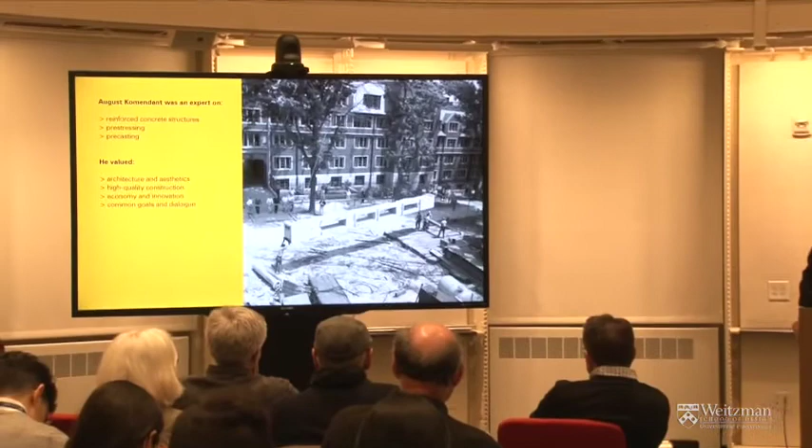Professionally, Komendant was an expert on reinforced concrete structures. He, from his studies onwards till the end of his career, focused only on concrete structures. He didn't work in steel or in timber structures. He was educated at the time by the best German professors. Germany was more theory-oriented in terms of concrete structures at the time. So Franz Dischinger, for example, might be the best known name.

He defended his thesis at the time. Komendant was a student at the school in Dresden. Early on, Komendant became interested in pre-stressing technology, which was developed by Eugène Freyssinet and Franz Dischinger in France and Germany, respectively. And after the war, Komendant was doing extensive work on precasting technology.

Why Komendant is important to me as an architectural historian is that he is among those structural engineers who valued high-quality architecture. He was very motivated to work with highly talented, often poetic architects, like Louis Kahn, for example, with whom he worked on about 15 projects. 7 of them got built.

It's a coincidence that they were both originally from Estonia. Louis Kahn left Estonia when he was 4 or 5 years old. Komendant spent a longer time there, and in late 1950s they met here accidentally. But I will come back to that a little later.

So Komendant was not just a service provider to architects. He was highly interested in the quality, not only of design, but also the actual construction process and the final quality of what gets built.

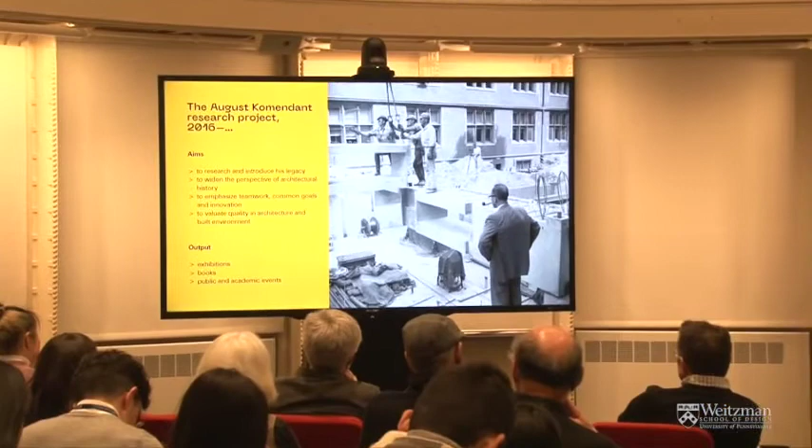Structural engineers have had a major role in a lot of interesting buildings which were built in the 20th century, but which are getting built now as well. We also wanted to emphasize the teamwork aspect.

We reached out to contemporary engineers and involved them in the exhibition project, gave them guided tours of the exhibition, and many of them came to visit the museum for the first time. So it was a nice way to reach different audiences with this, and sure, to evaluate the quality of architecture and built environment of the very recent history.

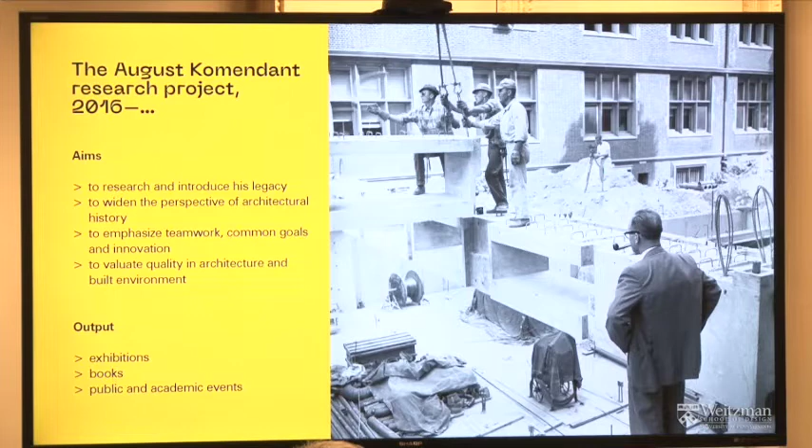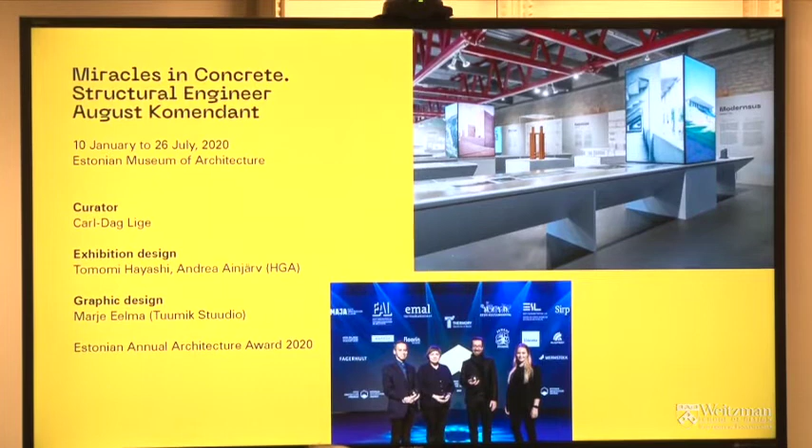So the outputs of the project, I would say the first large one was the exhibition. This was presented at the main exhibition hall in Tallinn, the Estonian Museum of Architecture. We were glad to receive an annual architecture award from the Cultural Endowment of Estonia for their core team of the design of the exhibition project, graphic designers and the architects of the exhibition.

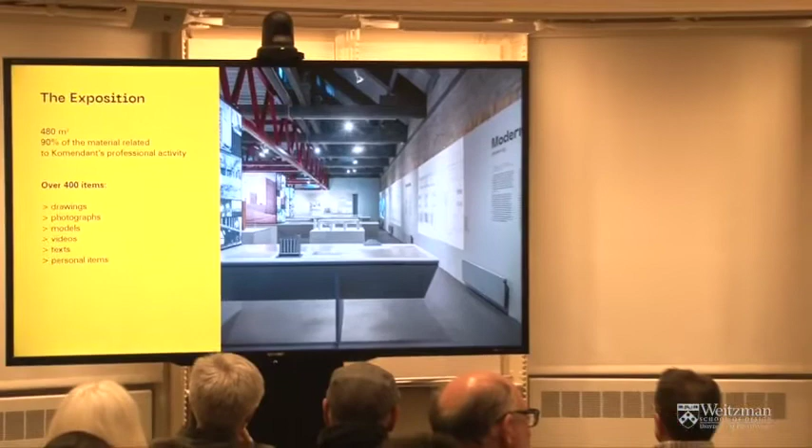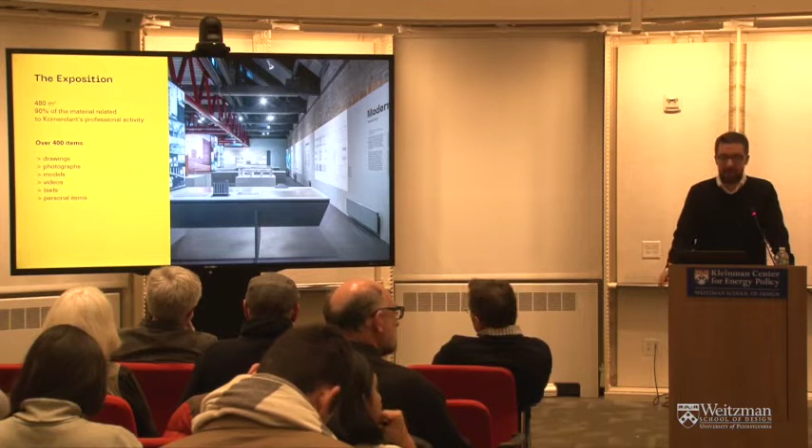It was close to 500 square meters and more than 400 items related to Komendant's career, many of them from the collection here at Penn.

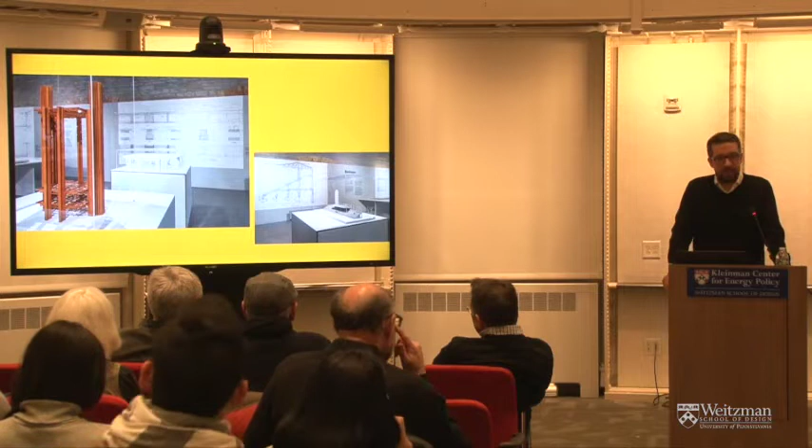On the left-hand side, you see an early structural model for the Richards Medical Laboratory building. This was the first time ever this model traveled not only outside of the US, but outside of Philadelphia. Let's see if it ever travels again.

So there were different personal items in addition to design drawings, models, and photographs on display.

This summer, we finally finished the book. The same core team, Marje Eelma is the graphic designer, together with her partner Martin Eelmaa of Tuumik Studio. The majority of the images are previously unpublished, and since I'm a historian, I don't have a technical background, either in engineering or architecture. So I did not want to cross my expertise, so to say. I tried to involve those who are more competent in the technical side.

I had a consulting engineer, a legendary Estonian engineer, Tiit Masso. He read the manuscript, made hundreds of remarks, and now, honestly, I can say that I am happy to give this book also to structural engineers to read as a history book, not embarrassed of its content.

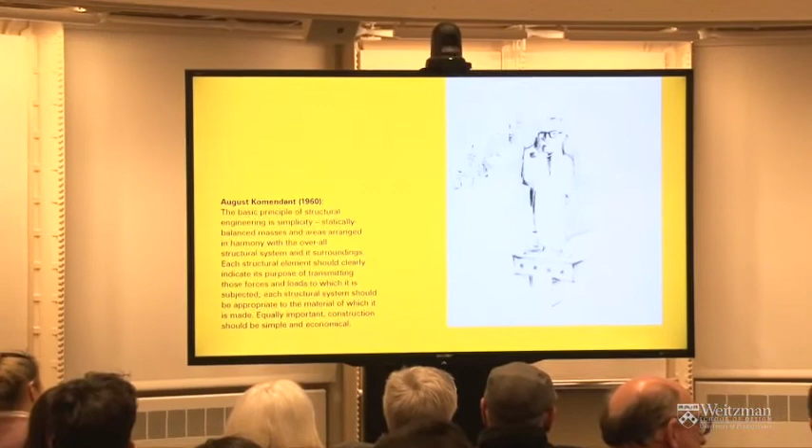It's like the core of his values, and I will cast a light on different components which are included in this. On the right-hand side, it's a nice caricature made by his daughter Merike. It's a concrete element, a column, part of the column of the Richards Medical Labs, and in the background probably the skyline of New York.

In his 1972 book, Contemporary Concrete Structures, the first proper chapter of the book is called Critical Evaluation of Design. There he addresses several concepts of design which combine architecture and engineering. So he kind of tries to build the bridge.

In terms of the creative activity, he emphasizes four different phases. First is the image phase, which includes the processing of ideas and concepts, meanings, the weighing of possibilities, and the analysis of meanings. This phase is abstract, free of limitations. This is immeasurable. This is something which is, let's say, more common to architects.

The next phase, the design phase, is more practical. It's the realization of the initial image. It's not abstract because it involves practical considerations and limitations. The third phase is construction, the building of reality and the realization of design.

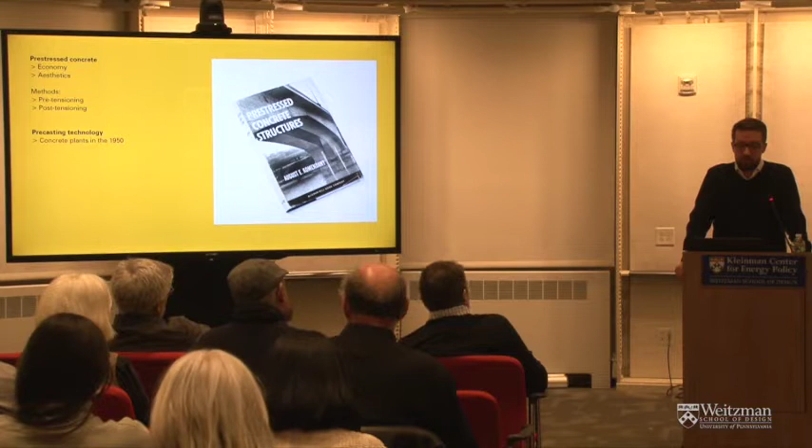Precasting - when he moved to the US, he designed several concrete plants, not only here but also in Latin American countries. So about 5 or 6 projects.

A few examples of his innovative use of concrete would be those. This is one of his first professional projects. It's located in Tartu, Estonia. On the right-hand side, a new hangar for aircrafts - it's a repair workshop. So there he used...

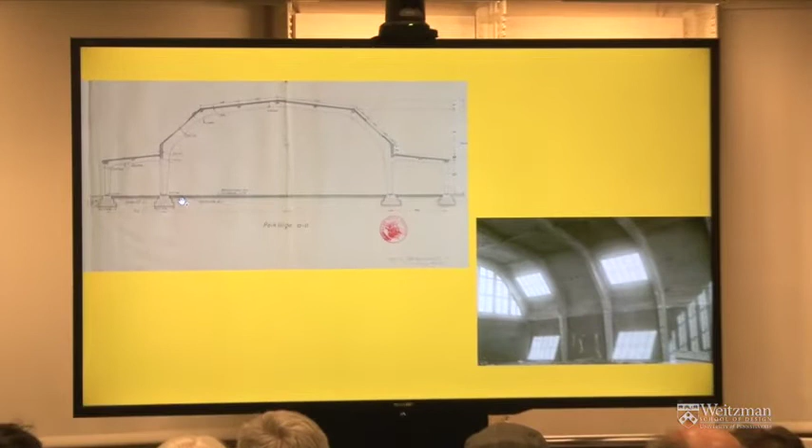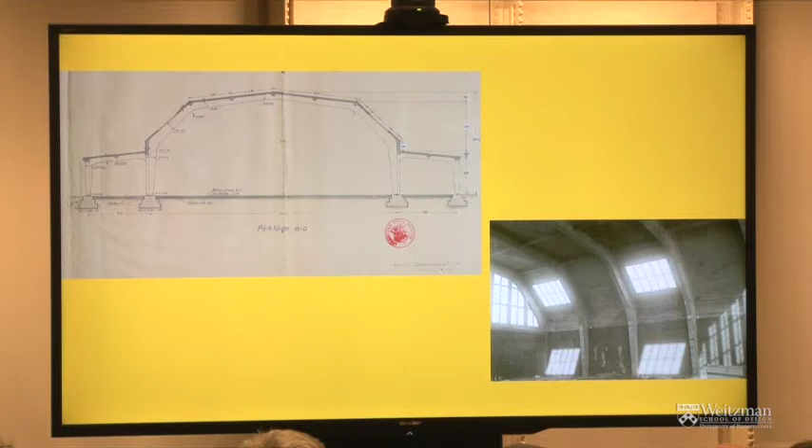This is supposedly the first case in Estonian architecture where pre-stressing was used. There are tie rods cast into the floor level here, and the steel bars which go inside the tie rods were pre-tensioned with huge wrenches before casting.

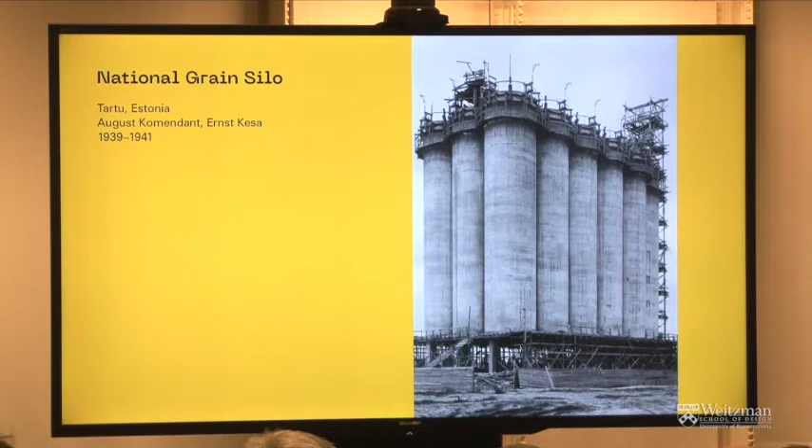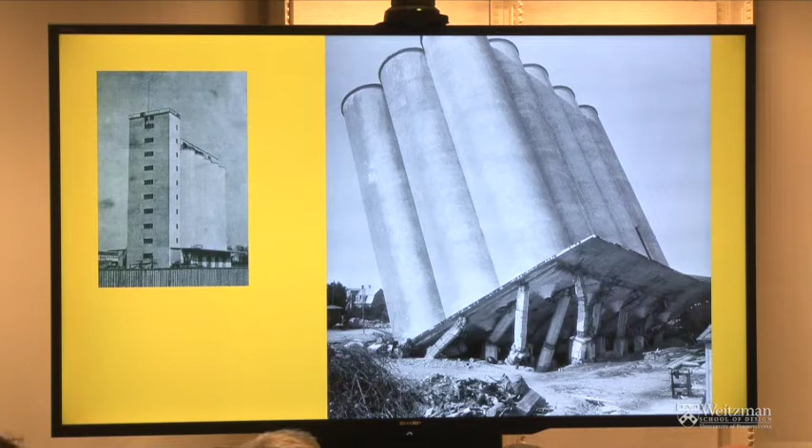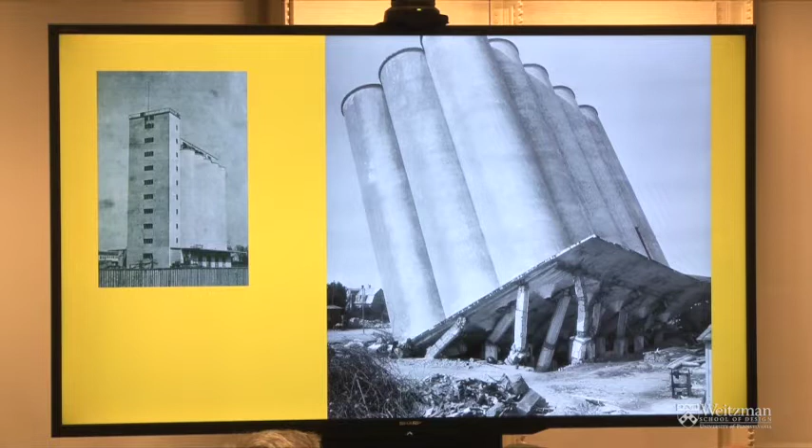This is another early example, a grain elevator, a grain silo, also in Tartu. Here Komendant proposed the use of so-called sliding formwork, which mechanically helped to lift the formwork so that you didn't have to build the whole structure or the whole form. Some workmen on the construction site. On the left-hand side, the silo as it was just completed in 1941. During the Second World War it was blown up, but part of the silos remained intact and was actually put back in use after the war. It consists of 15 monolithic concrete silos.

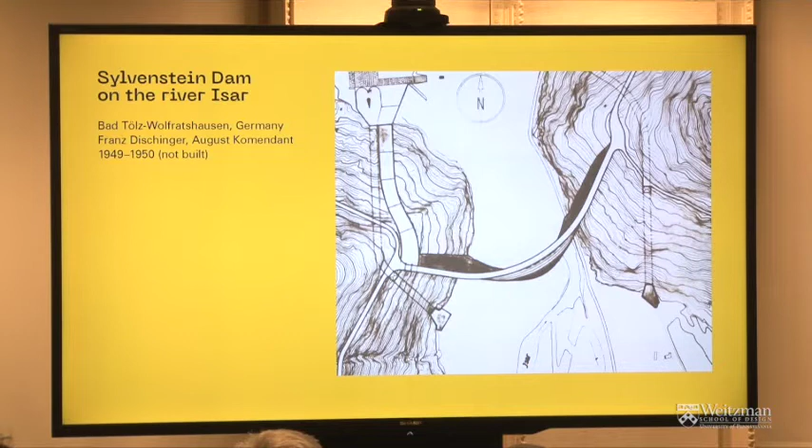Here is an experimental design project done together with Franz Dischinger after the war. It was supposed to be a huge dam on the river called Isar in Germany.

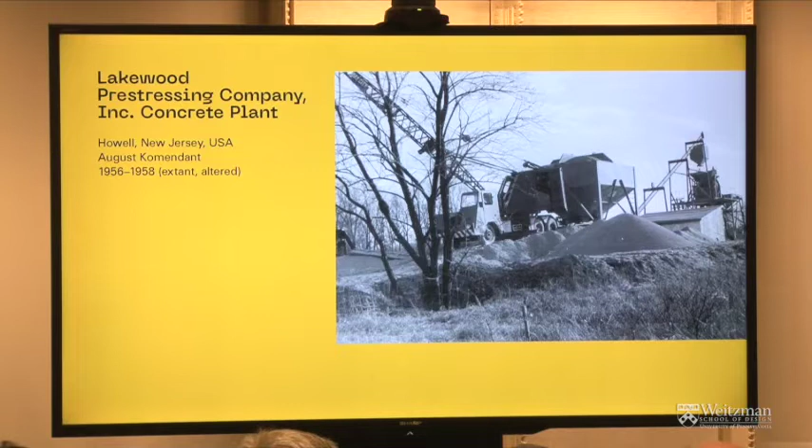There's another unbuilt project done together with Henry Klumb of Puerto Rico. He was of German origin, but later moved to Puerto Rico. This is a design for a church which combined precast elements and shotcrete concrete, which is a spray concrete.

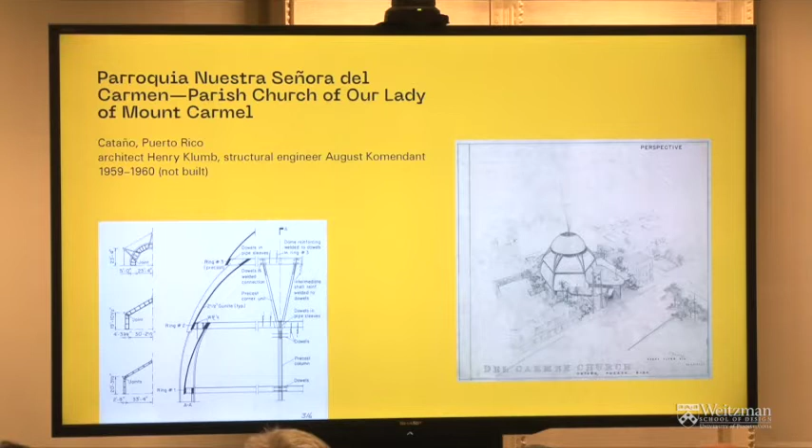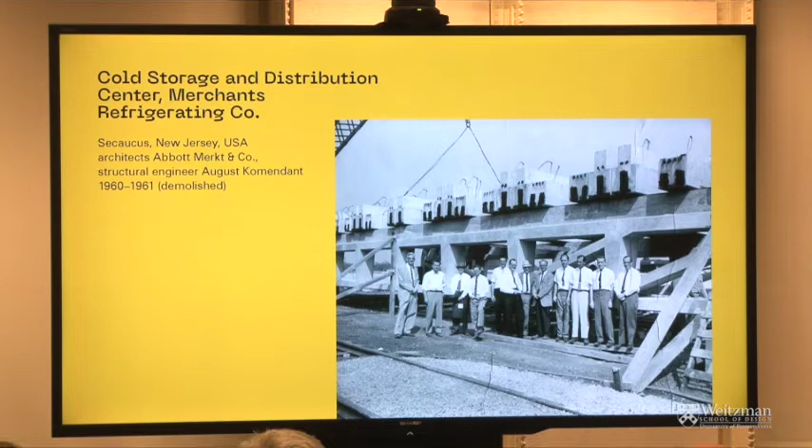Here is a group of engineers and contractors in another concrete plant. And this is one of the huge Vierendeels, so-called Vierendeel trusses, that was cast to build storage in New Jersey, a cold storage. Here you can see the assembly of the building.

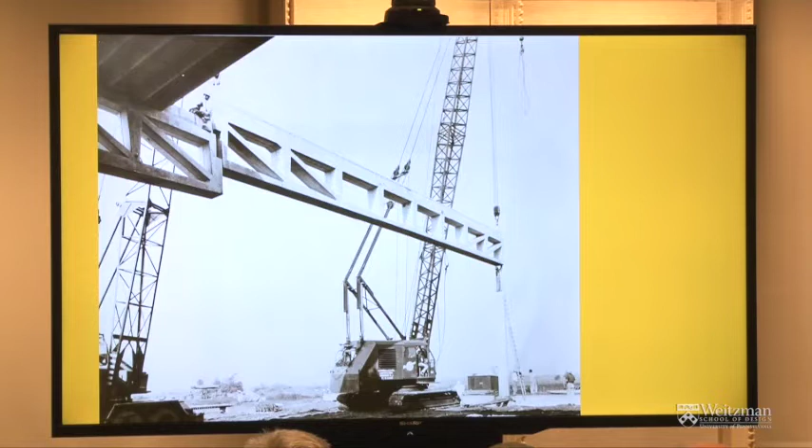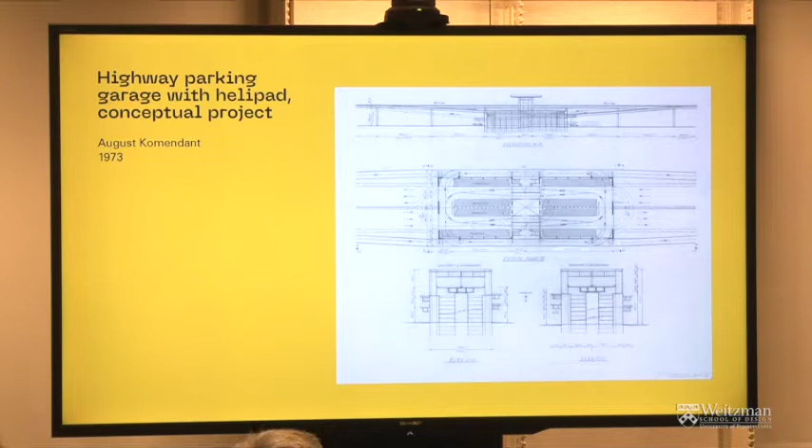So here's an experimental project by Komendant himself. It was like a highway, a garage and a helipad, and in one version included also a restaurant. How to combine highway design and architecture. I think he did it as part of one of the classes here at Penn. It was like an example to the students.

And another example is the K-System. It probably refers to the Komendant system. It's a modular building system he developed based on his experience on Habitat 67 and some other projects which used precast modules to build self-supporting boxes.

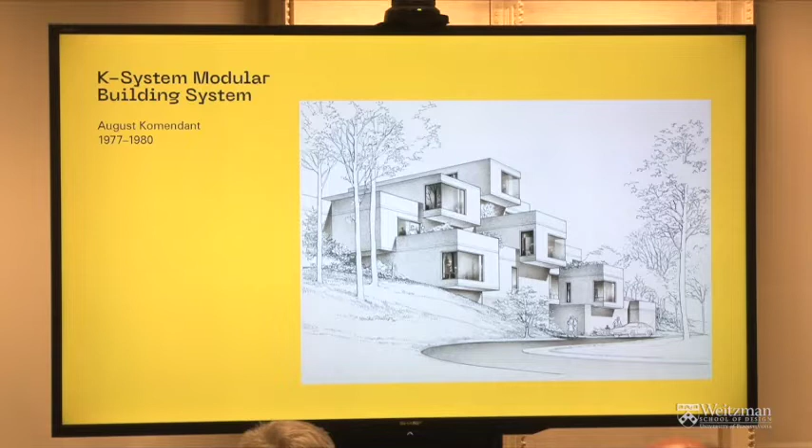But now, I chose 7 iconic projects by Komendant done together with more or less well-known architects, and I will briefly explain their background and try to bring out Komendant's role or the importance Komendant brought to the project.

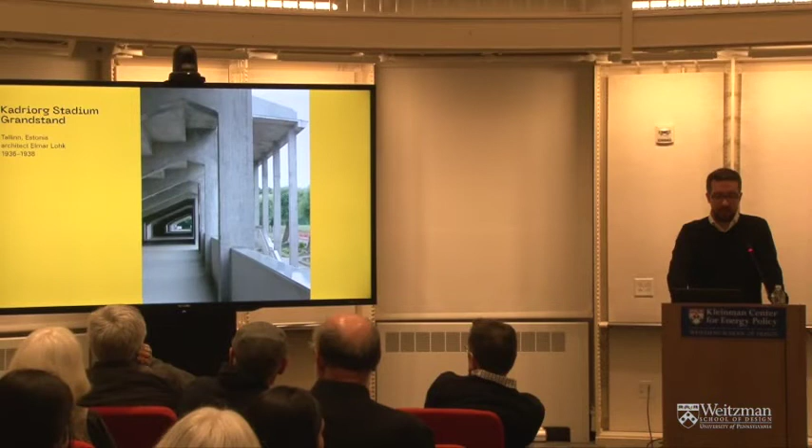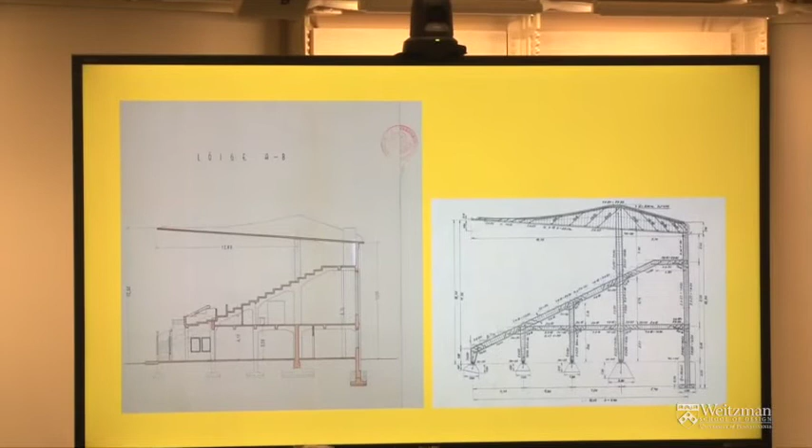So here's, I would say, the most important early work from Komendant. It's a stadium grandstand in Tallinn, Kadriorg Stadium, designed by Elmar Lohk, who was one of the best modernist architects in Estonia at the time. Here the most remarkable thing is naturally the cantilevering roof of the grandstand. Sure, there were earlier examples by Nervi, by Finnish architects who designed the Helsinki Olympic Stadium, but in a small country like Estonia, which didn't have a large construction industry and competence in that field, it was quite remarkable. This is a post-construction photograph just after it was finished, and it remains the most important national track and field stadium in Estonia.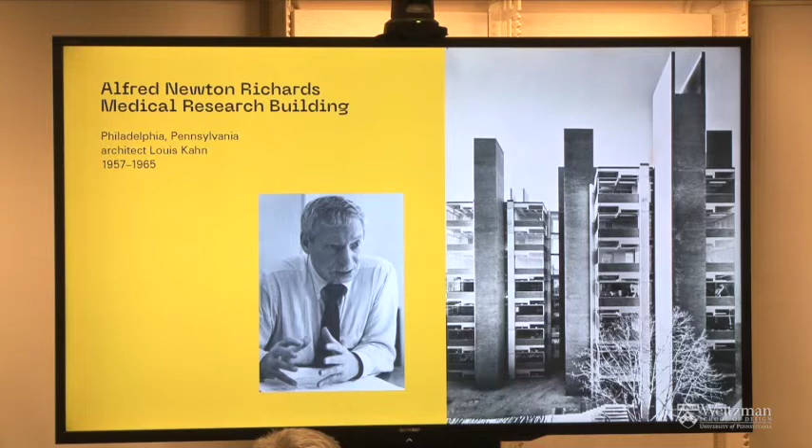Second project, we come to Philadelphia. The first major project Komendant did together with Louis Kahn is the Richards Medical Research Building, close by, just a block away. Komendant was reached out by Kahn's engineers to initially design a competition proposal for Enrico Fermi's memorial in Chicago. But it was also at the time Richards was just starting, and Kahn had become interested in precasting and new possibilities of concrete. So Komendant was somebody who could consult him to realize Kahn's visions.

This is an early structural solution. The model I mentioned briefly before - on the left-hand side, it's not visible very well, but it's an elevation of one of the laboratory towers.

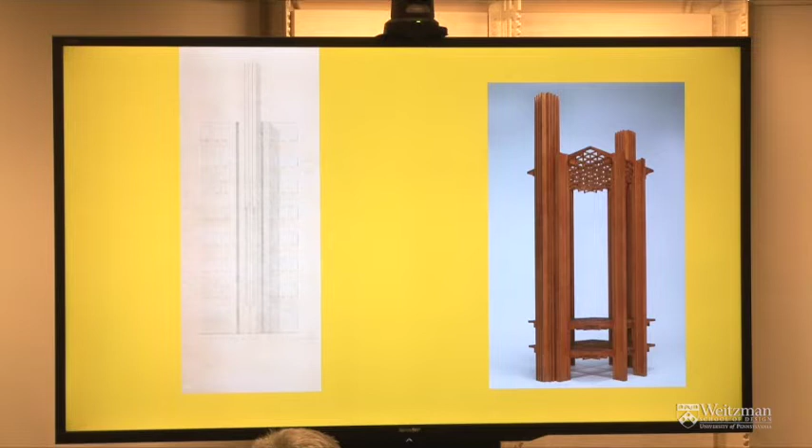And Komendant designed the structure to be built of precast elements. Here is the scheme, and it's like building a three-dimensional jigsaw puzzle out of concrete elements.

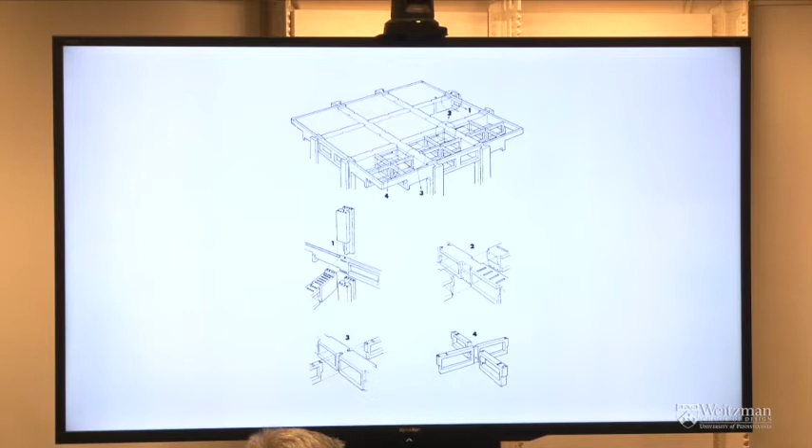Precasting technology and building out of concrete elements was a very new thing in the US context at the time. There were some earlier studies and implementation cases in Western Europe, but Komendant was somebody who tried to popularize precasting here in the States.

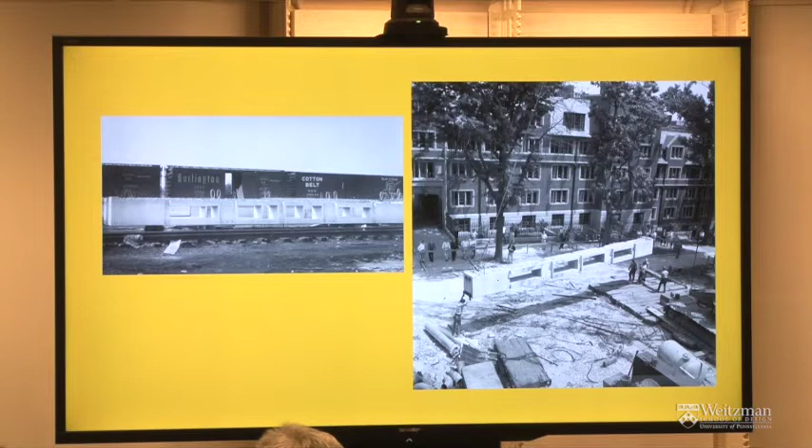This is Komendant's early design for one of the Vierendeel trusses. This is the early phase. This is how the final Vierendeels look like. On the right-hand side, they have arrived on the construction site. Here, the construction has developed further. On the left-hand side, this is the post-tensioning procedure with hydraulic jacks.

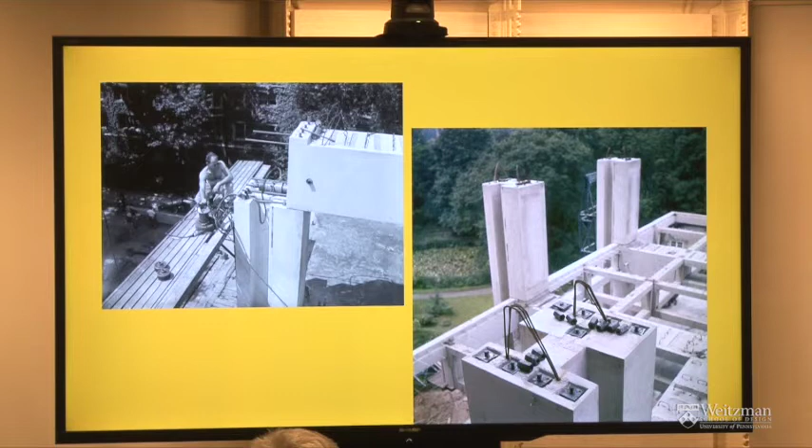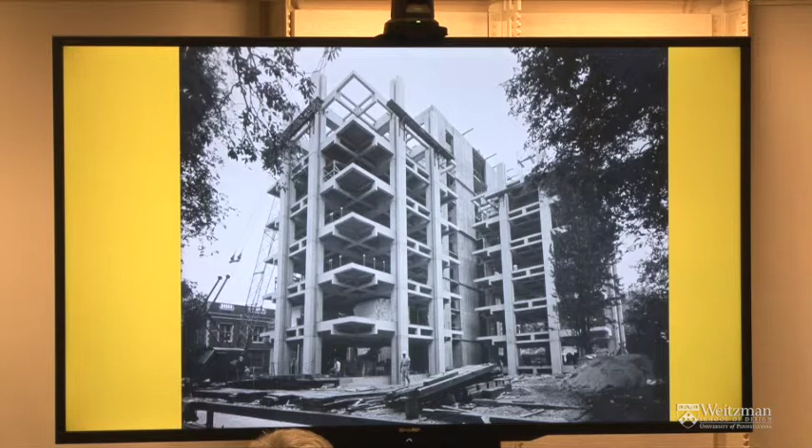This is how the floor slabs were prepared, different components put together. The central tower was built of monolithic concrete, but the laboratory towers were of precast elements.

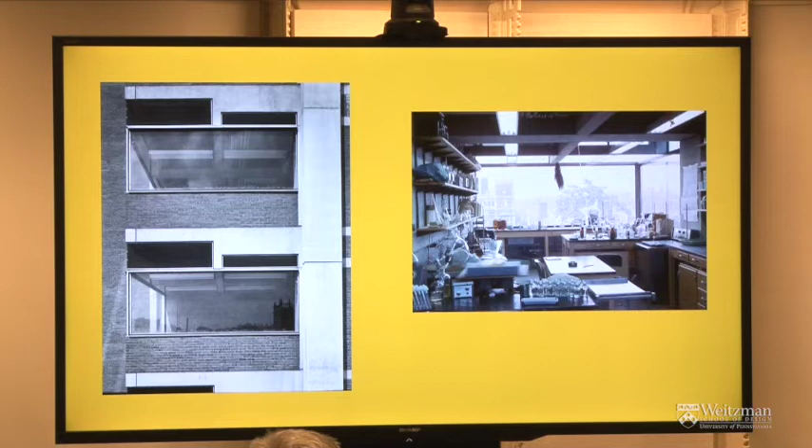And here, as many of you know, Kahn, together with Komendant, tried to express how the forces are distributed within each individual element, which parts are carrying, where you need stronger elements and where lighter elements.

I really like the photograph on the left-hand side. This is after the completion of the first construction phase, before the so-called biology towers were built. This is like a one-to-one scale section of a building in real life, which clearly exemplifies the principles of expressiveness mentioned before, how a building or a structure speaks about itself.

Another Philadelphia project, superbly important in the contemporary moment, with the uncertain future of it. The Philadelphia Police Administration building was one of the few projects Komendant did together with Geddes, Brecker, Qualls and Cunningham.

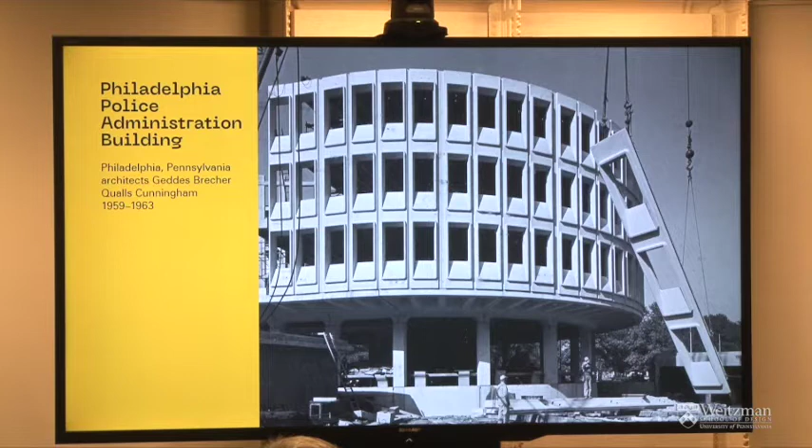This was among their first projects, and they were also interested in new technologies, new possibilities, and decided to involve Komendant in the process.

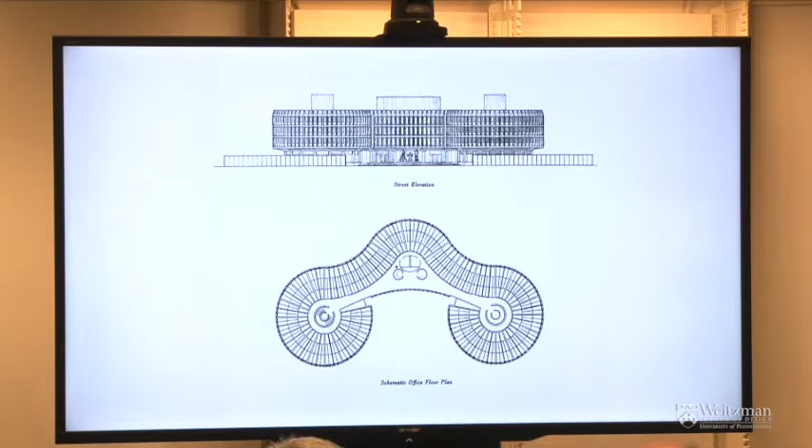So here's a street elevation and a schematic office floor plan with reflected ceiling plan. You can see the distribution of individual precast items or elements.

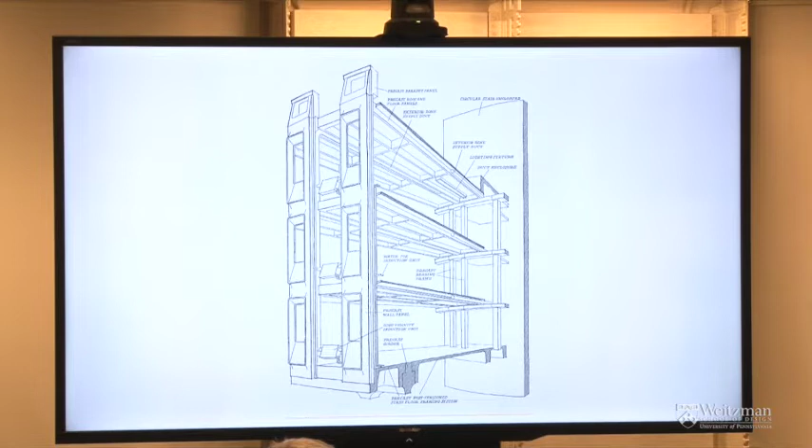This is the structural system. I'm not going into detail here. These are floor elements, and again the post-tensioning procedure. This is the facade panels.

These were load-bearing, post-tensioned structural elements. So this is not a curtain wall, but the exterior elements work as an organic part of the whole structure.

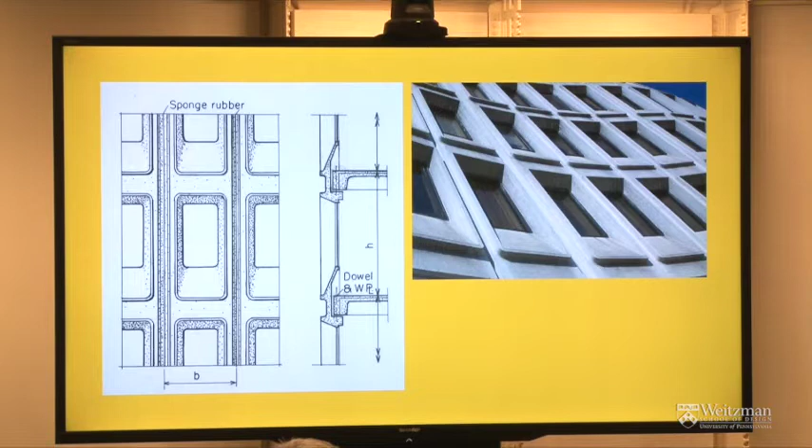At one point, there appeared cracks in one part of the structure during construction. Komendant, on the left-hand side, talking to Bob Geddes, was called on site, and as Geddes remembers, instantly knew what the problem was.

Apparently, the contractor decided not to put some steel rods in places where Komendant had required, just to save material. But if you skip some relevant materials in critical parts of the structure, then sure, you will have problems. But it didn't cause any substantial problems. Those parts which were problematic were redone, and the construction continued.

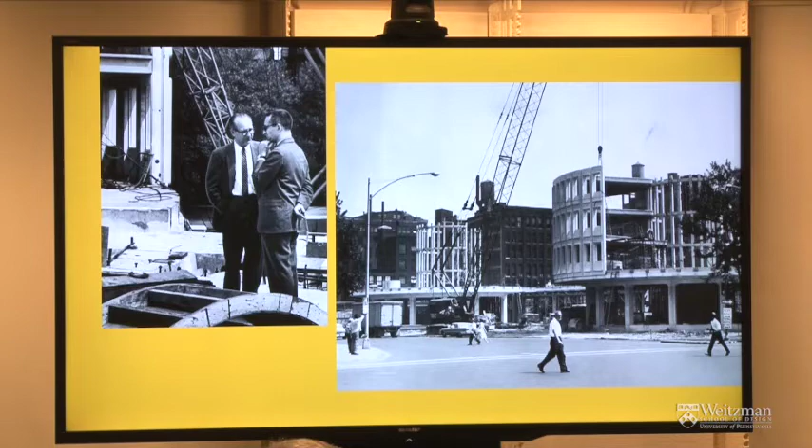So this is how the building looked after it was completed. Some color slides just a few years after it was completed. These are by George Yuri Komendant, who visited his father's work.

So, as many of you probably know, currently there's a huge debate going on about the future of this building. I can just express my personal opinion that it would be a terrible shame if this building was torn down. Sure, we have to acknowledge the injustice that has been done to particular social groups during the past decades related to police violence. But I would claim that architecture or an individual building is not guilty.

People make mistakes and bad decisions. There's a good possibility to rethink the future of the site, to involve those local groups that have been suffering the most. But sure, there's the debate.

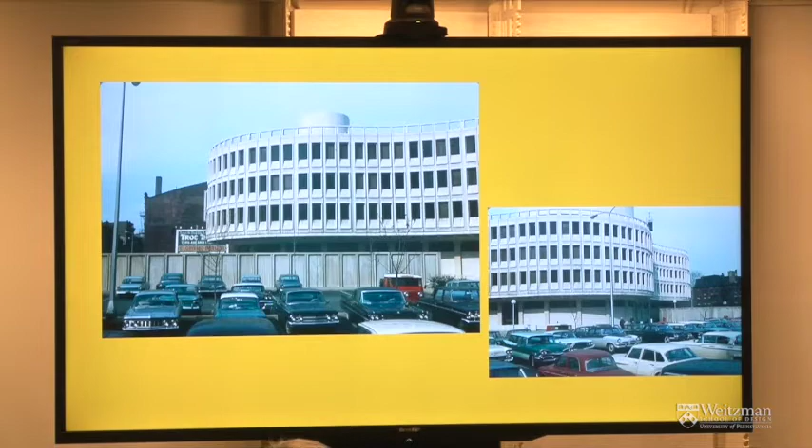I even wrote a short piece on the community wall, or whatever you call it. I'm not sure if it changes anything, or what are the key factors the municipality considers when they articulate their final guidelines for the future.

But as an example of innovative architecture and engineering, I think in the future it would be a remarkable site in Philadelphia to illustrate the optimism of the 1960s, how to contribute to society. It was kind of a renewal wave in the city. The Rizzo regime came later and kind of invaded the building and its architecture.

But we move on, time passes. We come back to Louis Kahn. Komendant was one of the primary structural consultants to Louis Kahn, also in case of the Salk laboratories, or the Salk Institute for Biological Studies, to be precise, in California. This is the iconic image, as you know.

On the left-hand side, an early sketch by Louis Kahn of the site. On the right-hand side, the building completed. This was the early site plan. The meeting house and the housing were not realized, but the laboratories were. This is the initial version where it was divided into 3 buildings. But Komendant was involved in both phases of the project.

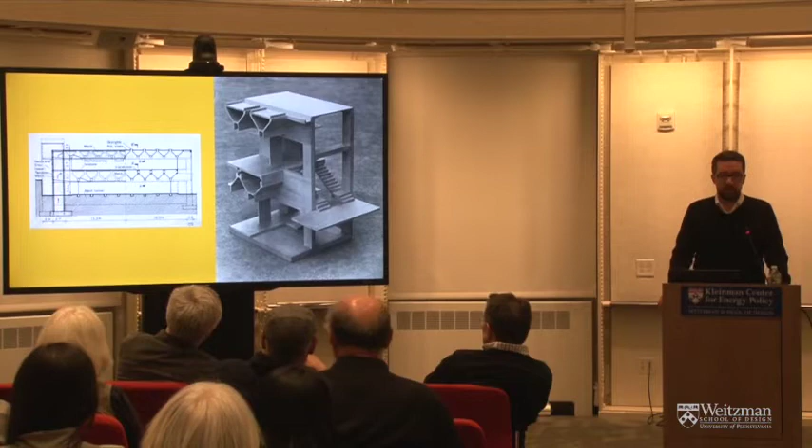So this is the early structural solution. It consisted of the so-called box girders and folded plates. The primary task here was to provide those large spans to make the work of the laboratories flexible.

This is not very well visible, but this is the final structural solution. Again, Komendant proposed Vierendeel trusses. So the central span is about 19 meters. And what is interesting here is that those Vierendeels, they form separate mechanical floors where all the mechanicals are placed so that the laboratories themselves remain free.

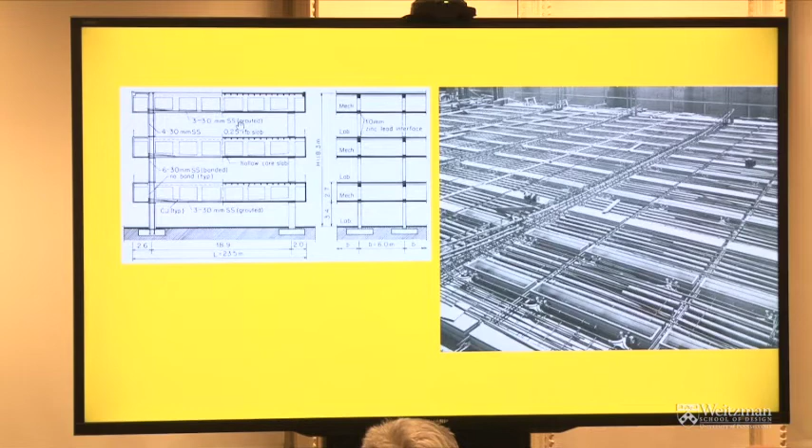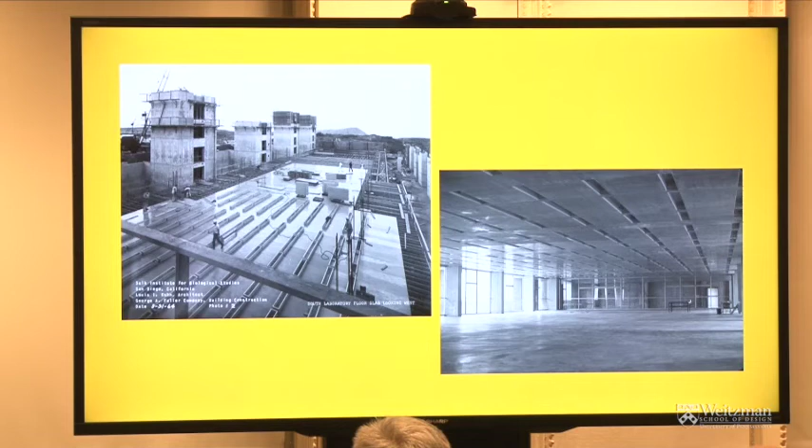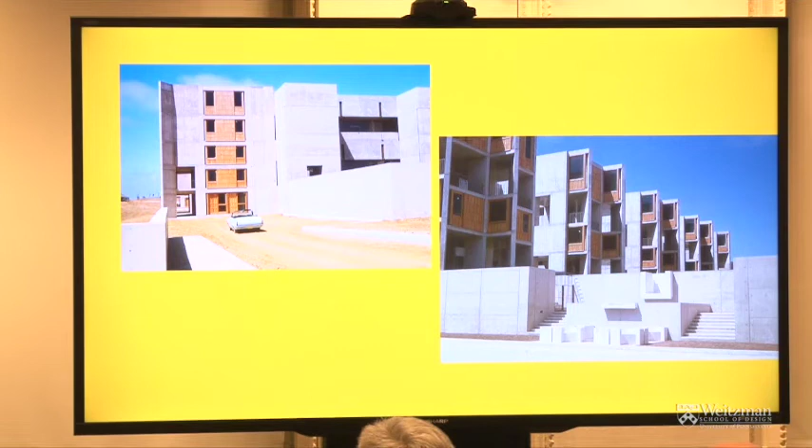Here you can see on the left-hand side preparations for casting concrete, and on the right-hand side the laboratory before it was put into use by scientists. The so-called study towers for researchers, and some color slides from the very final phases of construction. This is how it looked after it was completed.

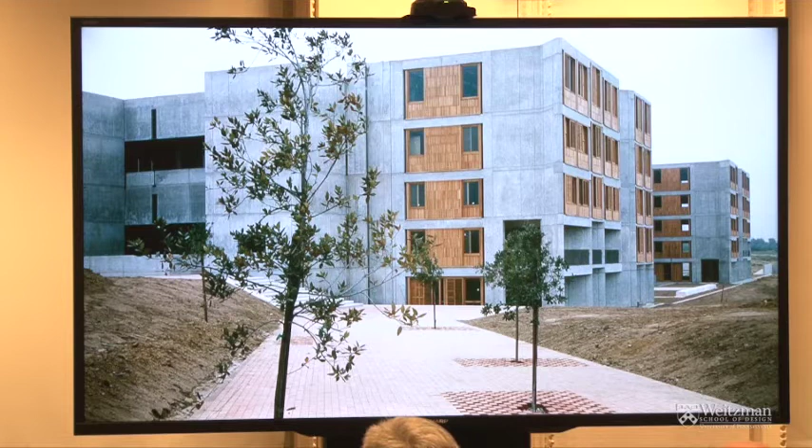Concrete having a substantial role, not only structurally but also architecturally. If you haven't visited Salk, I would strongly recommend it. I have to admit, this is among my top 3 architectural favorites I've ever been to. From the outside, many would say, oh, concrete, it's cold, bleak, ugly, whatever. But if you go there, the humane scale, the quality of detailing, the overall atmosphere of the ensemble, not to consider the climate and the top scientists, Nobelists working there—it's just great, it's just great.

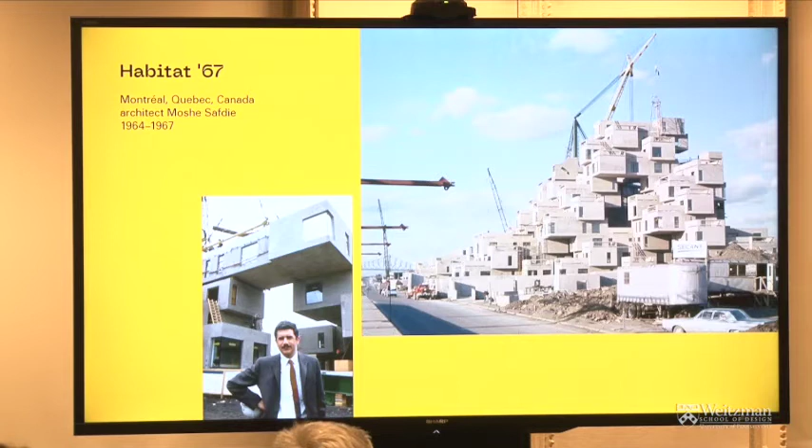Now again, briefly about Habitat. On the left-hand side, architect Moshe Safdie on the construction site. As a young architect, he was 26 or 27 when the project commenced. Sure, he didn't have the knowledge how to build that. He needed somebody like Komendant to make this reality.

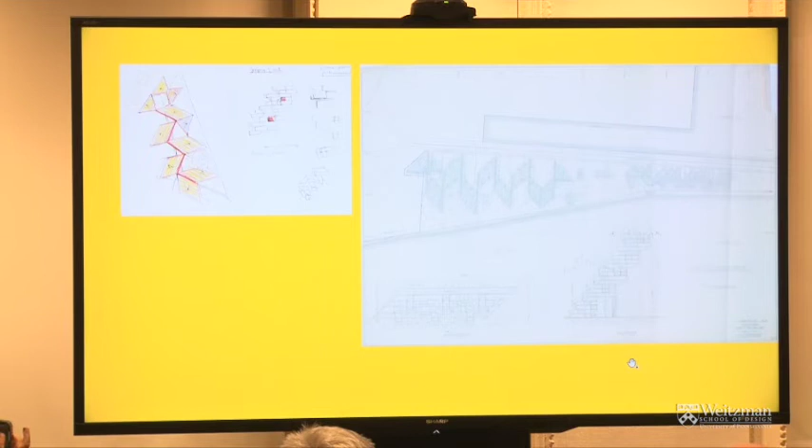What is interesting here, for example, is that Safdie dreams how the boxes would be put together. Komendant answers with cranes, trying to figure out how it would actually be possible to build on site, what's the location, and what's the sequence of construction. So some early studies. On the right-hand side is a beautiful drawing by David Rinehart, who used to work for Kahn, but Safdie stole him for the Habitat project.

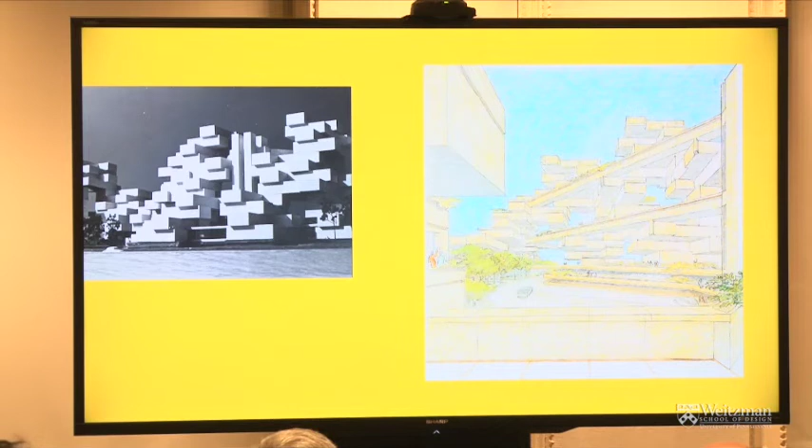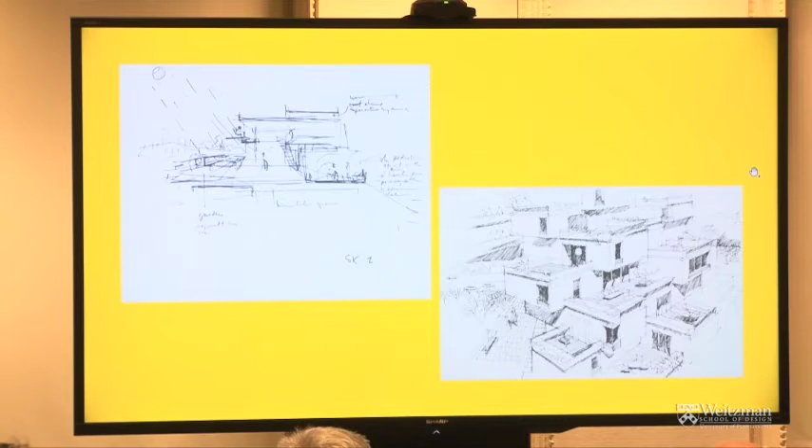The main idea of Safdie was to create a dense living environment, but one that would provide the qualities of suburban living or a private house. You had huge terraces, a lot of sunlight in individual apartments. So every apartment has a garden, some have several.

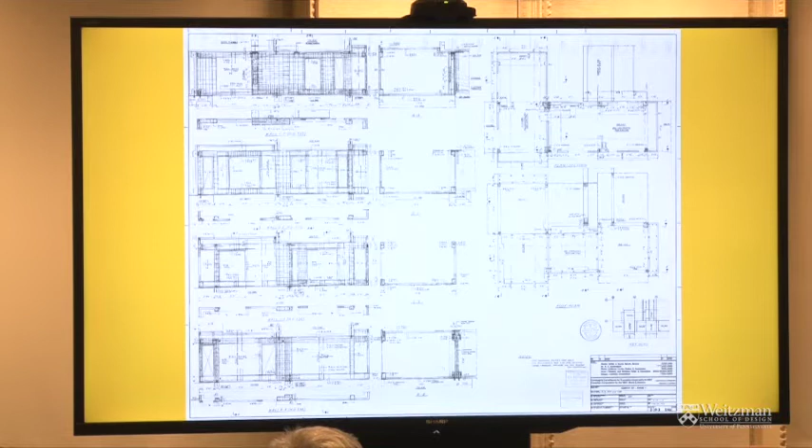This is a typical Komendant drawing, for one of the housing modules. This is a great image to explain post-tensioning technology. On the left-hand side is an example of one apartment and the different precast components which could compile it. On the right-hand side is an explanation of how the post-tensioning cables were put inside the ducts, inside the walls of the precast elements.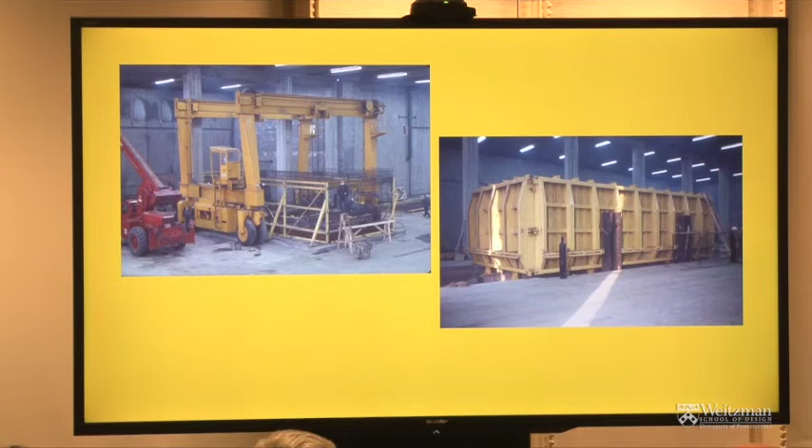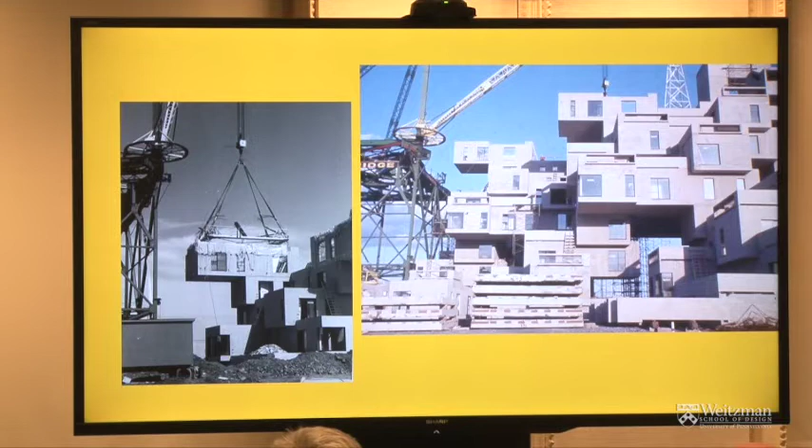Later they would ship them to the construction site and the crane would put them together. This is just after completion of the building. It still looks quite futuristic nowadays, even more than half a century after it was completed.

Sure, it's a success and a failure at the same time. It tested the boundaries of what modern architecture can be about. This kind of luxury living, I would say, is not possible for everybody. It became much more expensive than expected. Sure, it was an experimental project, but still.

Yes, so I'll move on. Kimbell Art Museum, I would claim, is the most important collaboration between Louis Kahn and August Komendant, one of the most exquisite art museums built in the world during the 20th century.

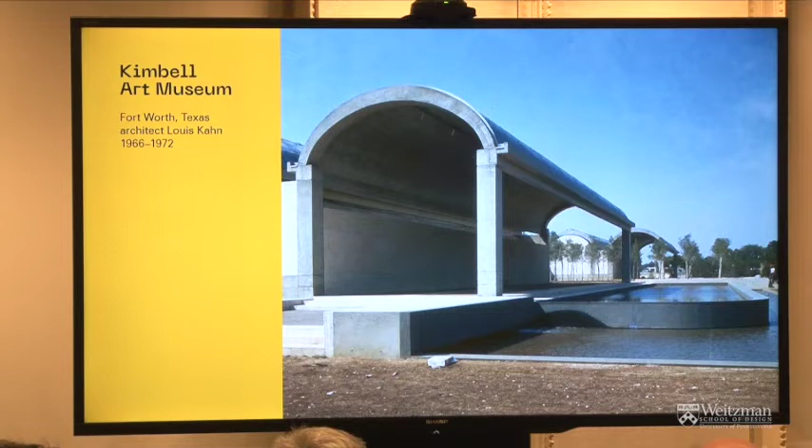Here I would focus on the so-called cycloid shells. Marshall Meyers, an architect from Louis Kahn's office, proposed to use this type of geometry. Komendant has said that this was the first time cycloid geometry was implemented in real life, and it hadn't been used in architecture before.

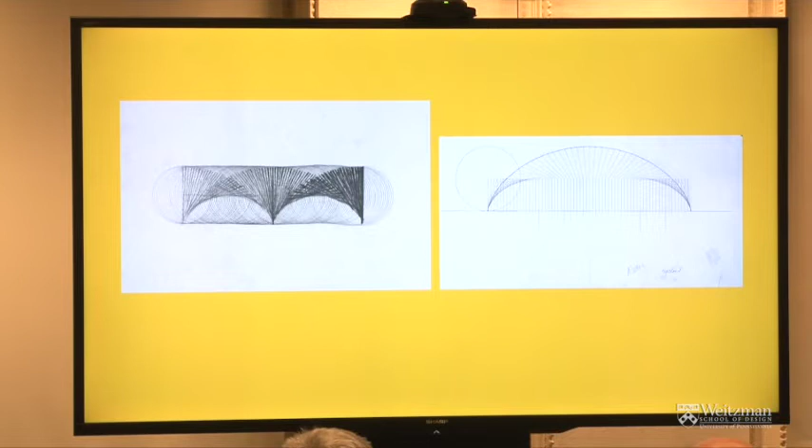So these are some of Marshall Meyers' geometric studies. This is his early drawing of how it would be. Actually, it wouldn't have functioned like that, but what is remarkable here is his thinking about the use of light—the use of natural light, how the shells would reflect it.

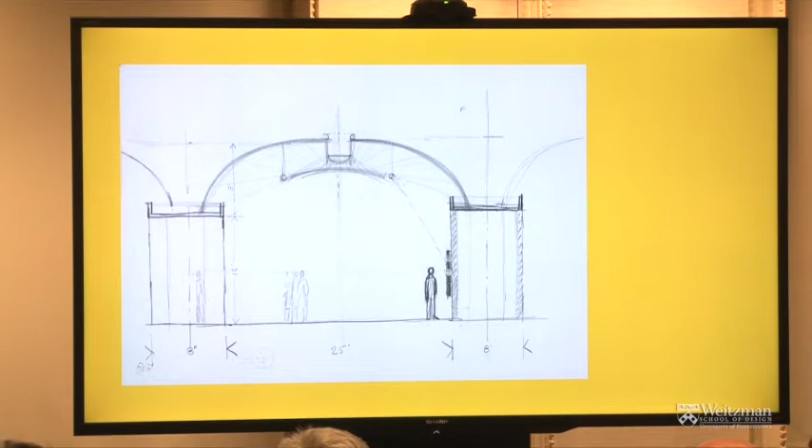Here's the artwork and the visitor in the gallery. I'm sorry I put the Kahn drawing so small here, it's barely visible. But this is another indication of how an engineer and an architect have a dialogue, a conversation.

The so-called cycloid shells work longitudinally, not in section as typical barrel vaults do. This was Komendant's genius—he figured out how to make them work, again using post-tensioning cables and geometry, so that they help create and realize Kahn's vision.

Of a gallery which is supposed to be the best environment for those exquisite artworks which the Kimbell collection has. The glass window here—the thickness or thinness of the profile changes. This reflects how the end beam works and how the cycloid transfers the forces.

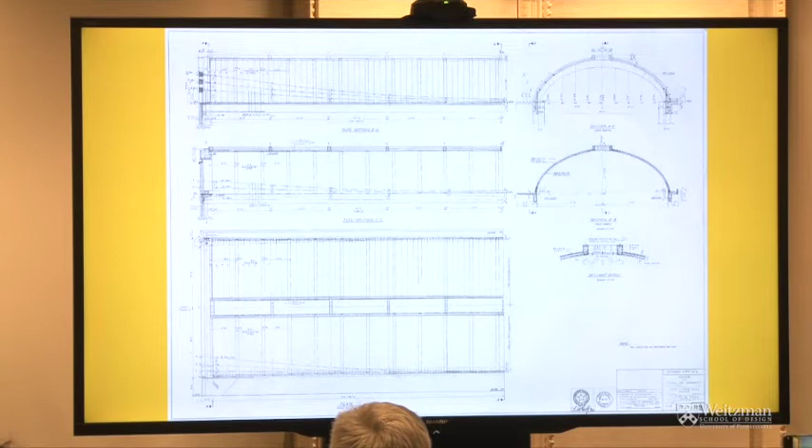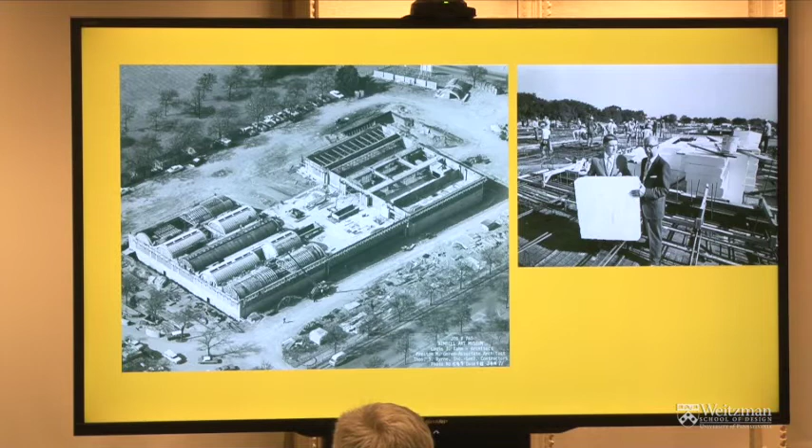Some construction images. Komendant also helped implement an innovative solution for the floor slab using styrofoam to make the structure lighter and save on materials. Here you can see the post-tensioning cables, just before casting. This is ordinary reinforcing, and from here the post-tensioning jacks were connected.

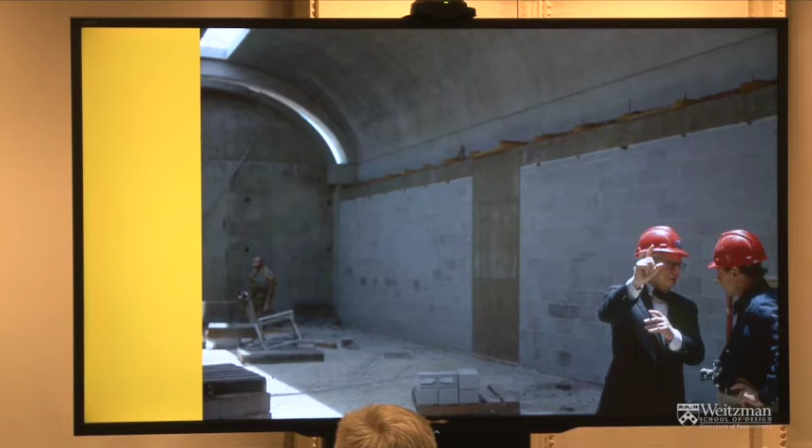It's Louis Kahn on the construction site saying to the photographer, 'Look up, this is where the magic happens.' And this is Marshall Meyers' photograph, made probably a few years after the building was completed.

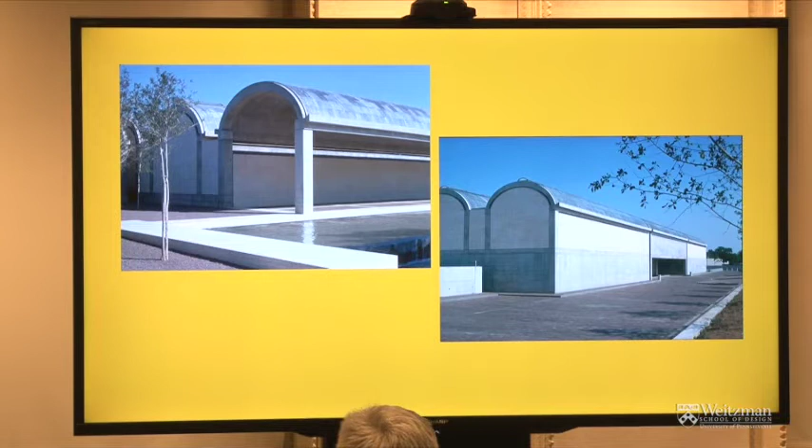A remarkable result in terms of materials, the atmosphere, the warmth is, I would say, comparable to Salk because of the combination of the light, the concrete surface, but also travertine, and how the different elements, architectural and structural, work together. It's a building which talks about how it was put together, constructed—the front entrance, portico, and the back entrance.

And briefly, the final project, which remained unbuilt unfortunately. In the later part of his career, after Kahn's death, Komendant worked on several occasions with Oscar Tenreiro, the Venezuelan architect. He's still alive, and has been very helpful during our research project, making available his archival materials which he has in Caracas.

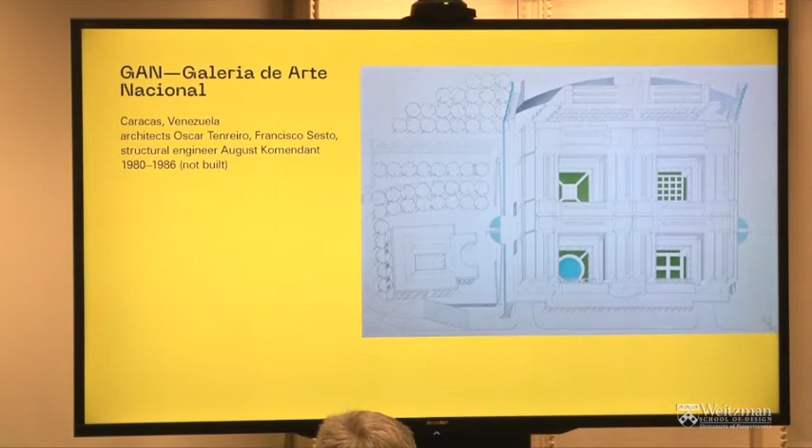So from 1980 onwards, together with Komendant, they made a proposal which almost became a project for the new National Gallery in Caracas—a national arts museum, a huge building with quite an exceptional structural solution. It's somewhat similar, has a family resemblance to the early version of the Salk structural system. It uses folded plates.

There's an interesting story of Kenneth Frampton. Tenreiro is good friends with Kenneth Frampton, and he invited Frampton to give a lecture in Caracas in the early 1980s, just when the project was beginning, and supposedly Frampton said that you should have a patio. So Tenreiro says this might have been a key moment to think about the interior gardens as part of the museum.

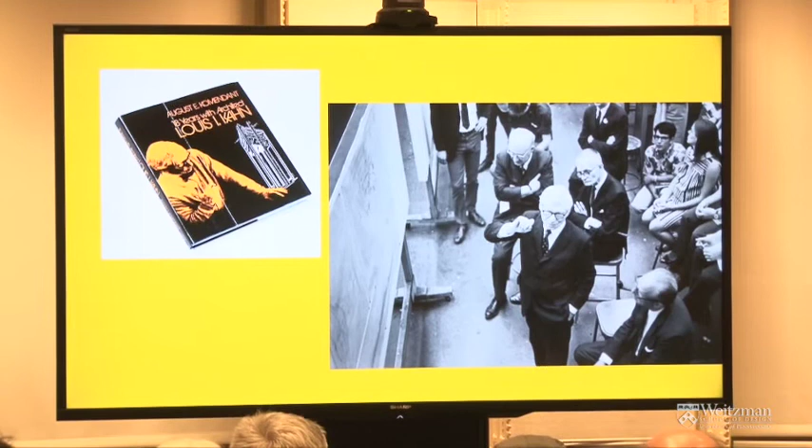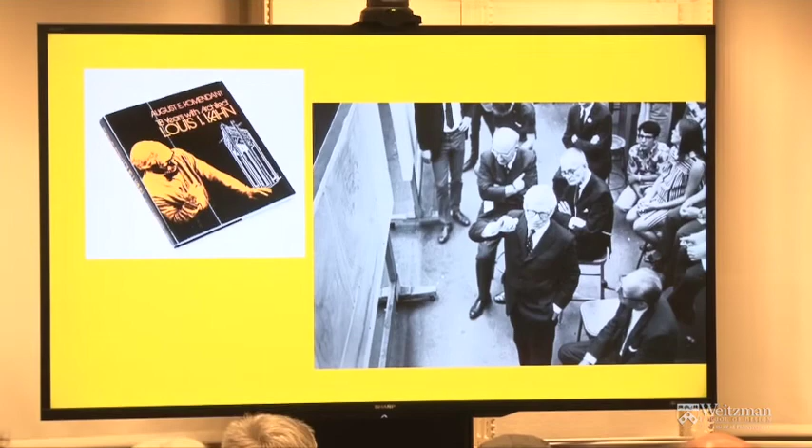Here they are together at Penn, possibly in the very same room. Bill Whittaker says yes, right about here. So this is Kahn's studio, the staff: Kahn, Norman Rice, Robert Le Ricolais, and Komendant sitting here.

I think this is part of his legacy. The fourth relates to teaching. He spent approximately 15 years teaching here at Penn together with Kahn. Later he moved for a couple of years to give lectures at Pratt Institute, and he was a visiting lecturer at several US and international universities.

So Komendant felt that teaching is something important to him, but also to the general betterment of design and the built environment. He taught a lot of architecture students, not only engineering students—here at Penn primarily architecture students, because he was part of the Kahn studio.

When I started my research, it was so difficult to find pictures of Komendant where he would smile. But actually, now I've learned that he made a lot of jokes. He liked to be in the center of attention. He was an incredible, very spirited personality. He had very strict views. He didn't like to argue. He liked to be right about things.